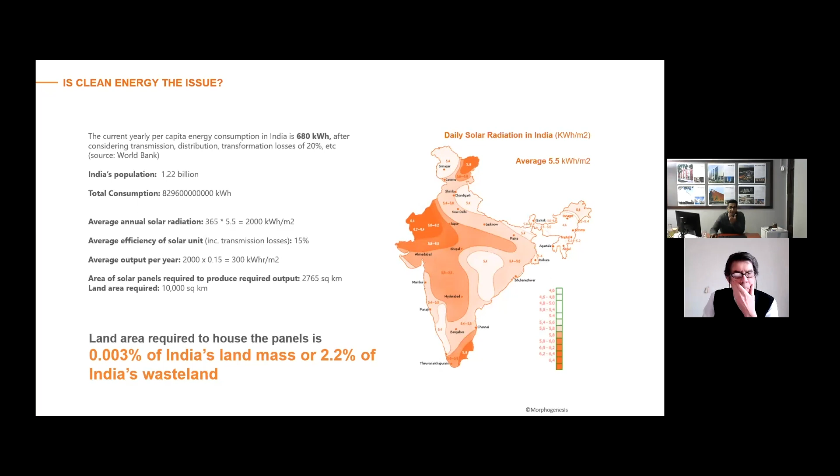Broadly speaking, India has a daily solar radiation of on average 5.5 kilowatt hours per square meter of the country's land mass, so we only really need 0.003% of this land mass if we were to drive our entire energy by solar. It's actually nothing. Only 2% of the wasteland, the deserts of India, is all that we would need to drive all the energy, not for today's requirement, but for what is projected for 2050. And we started thinking, what really is the issue then? Why? And then the second part was water.

If you just look at the annual rainfall, I know this is very macro level data, but it laid the context of what we would do at a micro level, given the fact that energy wasn't a problem, but it is. Water isn't a problem. 2% of the rainfall in India, if harvested, would suffice 150 liters a person for 1.4 billion people. So what are we really doing?

And we were looking at our cities, and we were looking at our buildings, and we had developed this sort of system where our buildings would consume energy and they would consume water and they would generate waste, and it was a one-way flow. And we began thinking of how we can short circuit that.

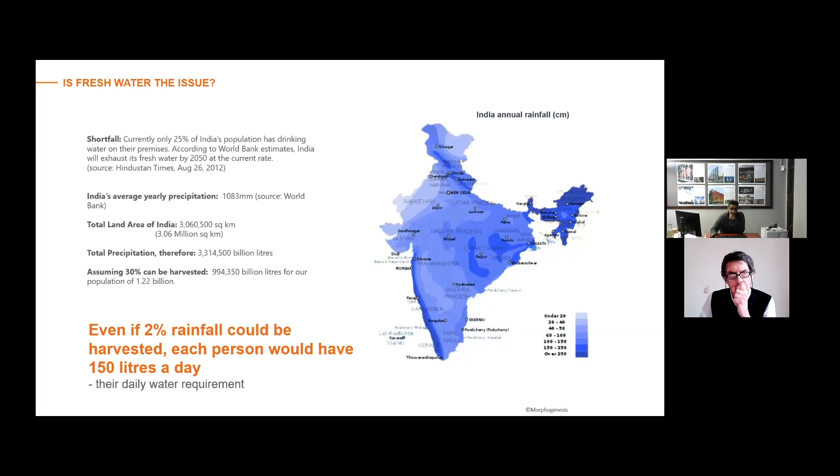How can we begin to look at our architecture where it can go off grid? If we were to assume there was no energy and there was no water, how can we begin to go and design architecture that would allow us to do that?

And then this came along, and this was now last year, the world's largest mass migration. 139 million, 140 million migrant workers were displaced in this pandemic because India is largely a country where migration is critical. And these images drove us crazy. The world hasn't seen something like this before.

And most of these migrants are essentially people working on mine sites. A lot of them are construction workers. A lot of them are working in industries, are working in buildings, are working to service urban India.

And that's when we began to think also about the fact that we need to expand the scope of sustainability, or sustainable environmental design as we understood it for the last 25 years, to begin to affect all the stakeholders, not only the building, because in a sense, we can save the planet by saving the energy, but that's not the problem. The problem really is the people.

And how do we begin to bring sustainability and hence resilience to a much larger population, all the stakeholders involved in the building process? And we began to map out, and this was early last year, all the hotspots of migration. So my presentation today is going to overlap in two parts.

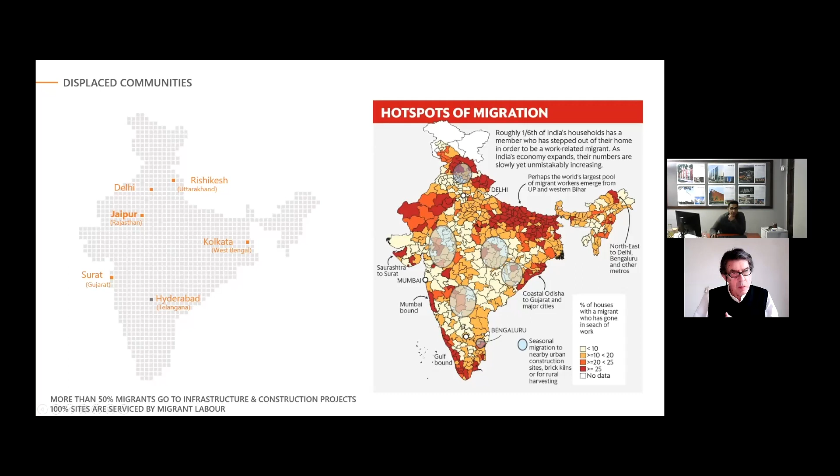So moving on, what Simos was referring to, the only reason we copyrighted our design process, which we developed over the last 2.5 decades, was more for our internal yardstick, and in fact I was a director at the School of Architecture for 5 years.

Indians, by and large, like very, very tangible data. So they like metrics, evidence-based design, and a lot of that also comes from a long history of very limited resources. So even if you have a client here, and you tell them my building will be sustainable, they don't understand until you tell them why.

So what you see on the top here is through this process of sustainability, where our main aim has been to push our projects to net zero energy, net zero water, fresh water, and net zero waste to landfill. Optimization has been mostly about how do you build less, how do you do a lot more with a lot less.

And typically speaking, a typical RCC building weighs 1,500 kgs per square meter. And if one person in an office building occupies 10 square meters, that's about 15 tons of material traveling to provide shelter to one person in an office. And if you take a residence, it's much higher.

And our argument has been, therefore, that the lesser you build, the more sustainable you are. So optimization is a strategy and a set of metrics that we have developed where we try and build less. And essentially, that's about removing embodied energy, and that's about reducing CO2 emissions from how you build something.

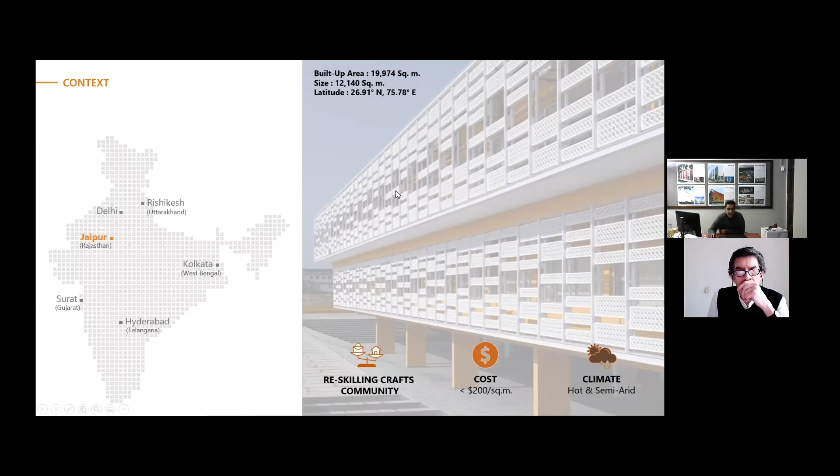And we began thinking about how we are going to be able to build this building. And the first thing that came to our head was to throw out the air conditioning. Because you throw out the air conditioning, along with that, you reduce all the electrical equipment, but more so, you reduce the fact that the power generation is also done locally. So you have these diesel generating sets that generate that power, and you get rid of that as well.

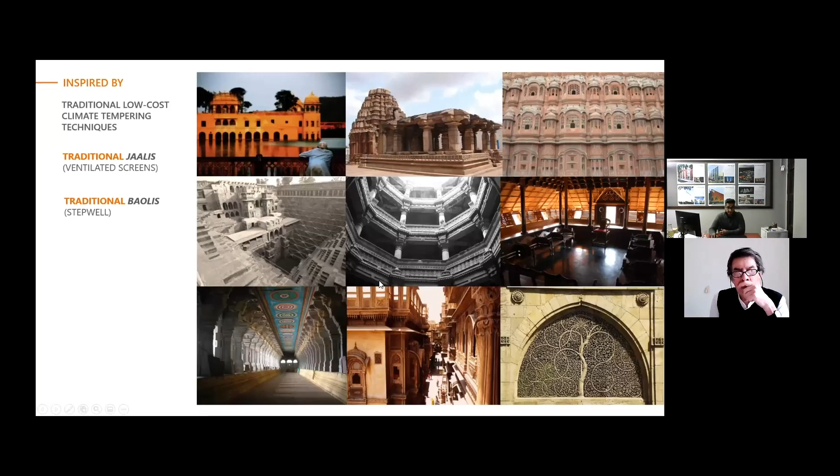And we studied a lot of the traditional architecture. We used computational models to understand how step wells work, why they are cooler at the bottom than the top. We understood evaporative cooling, jalis, ventilation, shading, and we then studied the local geology. A lot of this, I may repeat, was being driven by the fact that if this building had to be built at that cost, then what could we do? So we mapped out a 200-kilometer radius. We said every material that we will use will come from that, because transportation costs are extremely heavy.

And the other thing that we discovered at the time, which I think emanated also a bit from my studies with Simos, was that the temperature of the Earth about 3 meters below the surface is equal to the average temperature of the region. And in Jaipur, which goes from 0 to 48, 49 degrees, the average was floating around 25. And we said, hey, that's very useful. Which is why, if anyone has visited India and gone to a step well and come down, it naturally feels cooler, because the earth banking along with evaporative cooling is a phenomenal cooling mechanism. It's an underground air conditioner, naturally driven.

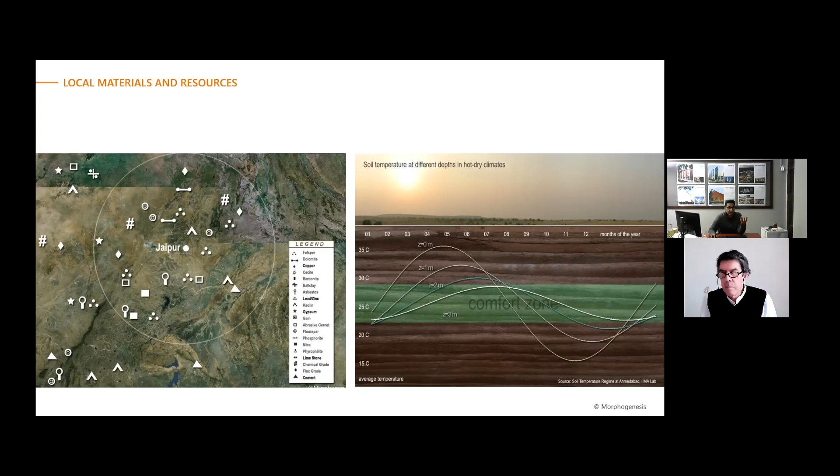So we said, fine. Now, typically speaking, any institutional building in India would be built as a block, and then you would have the open space, which is the recreation space. But when you're in a desert climate, that open space is really worth nothing. And a key example of that would be Dubai. I know that we must have a whole team there. These large outdoor spaces become mostly unusable through the year.

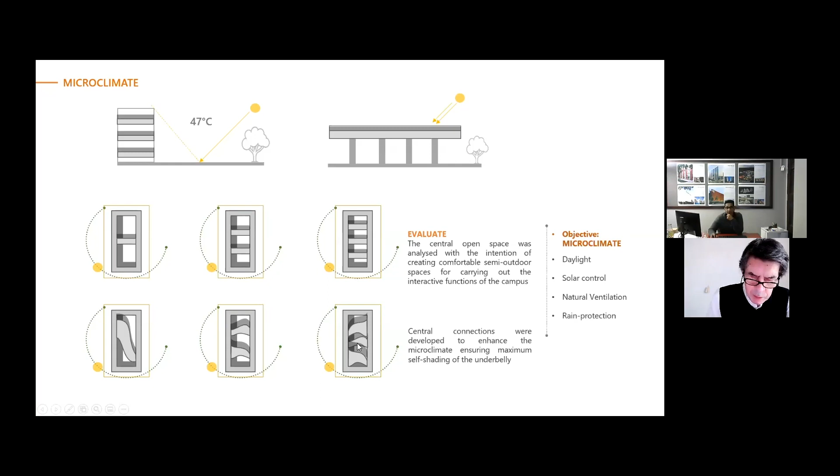And we said, well, we won't do our building vertically. We'll spread our building out and use the whole building as a shade, like a tree. And therefore, the space under the building will become viable. We did a very optimized, simple rectangular form. The idea was again to decrease the amount of surface area that we exposed to heat gain. And we went through a series of courtyard morphologies, the idea really being to keep the sun out, but let the daylight in.

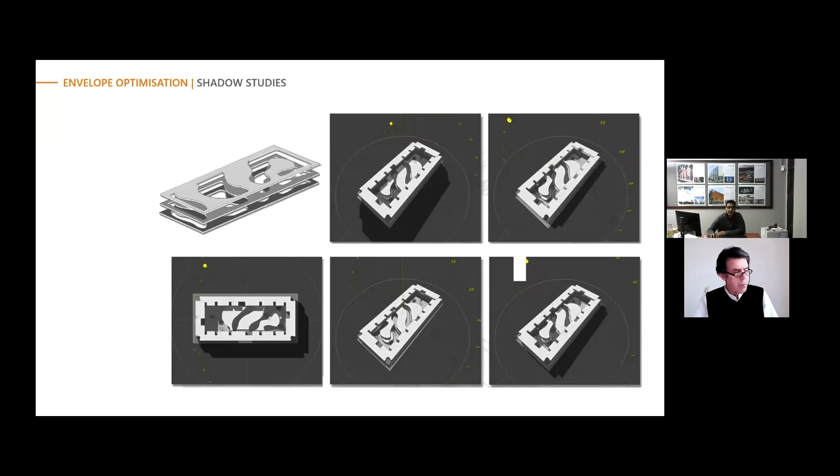I'm not going to show you these diagrams. All of you probably know them very well. But the idea really was, because it was a design and fashion school, the emotional element was that if you were inside this very rigid form, which was driven by our environmental criteria, the courtyard should not be like a rectangle. It should flow freely like a Mobius strip. And that was the model when we began about a decade back.

To achieve the parameters of no air conditioning in a desert climate, we sunk down 3 meters. We recycle all the rainwater and we recycle water from the toilets by filtering and using a treatment plant. And we created our own step well, a Baoli, in effect, which allowed for evaporation through the courtyards and cooling the building internally. And that negative space, if I may, was pulled out of the program.

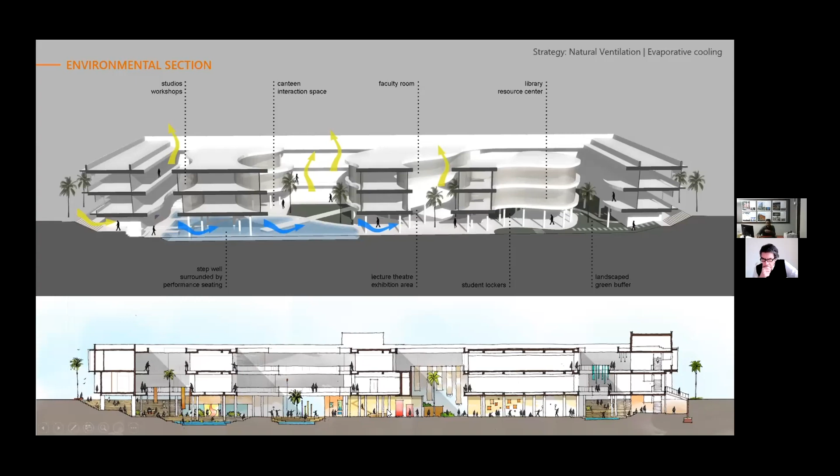So we were supposed to build about 25,000 square meters. We built about 2/3 of that. And that entire area underneath, which to date operates at about 28, 29 degrees Celsius naturally, is used for an outdoor cafeteria, for various functions, performances, etc. That whole underbelly section was designed to do that.

These are just some of the pictures of the step well that we created. All the water is harvested. Not a single drop of water leaves the site. We were just trying to work with limited resources effectively. And obviously, the whole thing sits in shade. It captures the wind flows and it cools the building down.

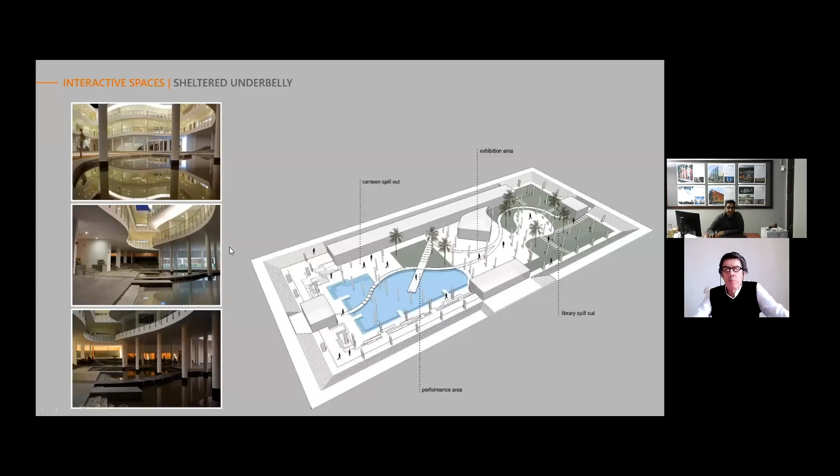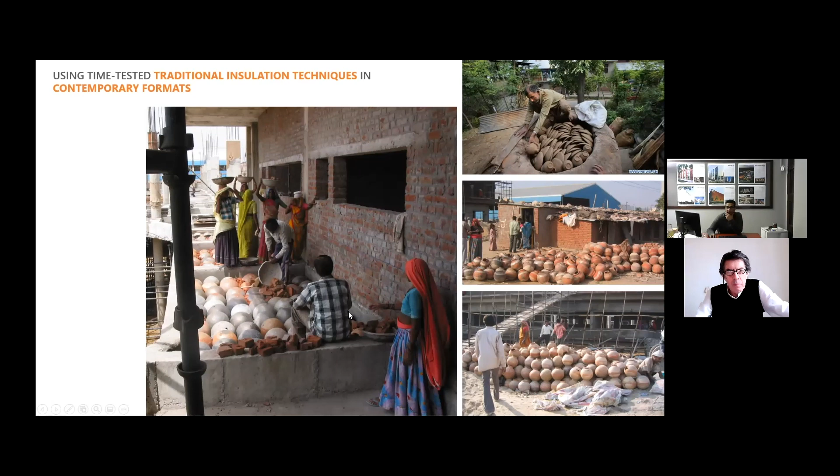We looked at insulation. Insulation was very critical for a project like this in a desert climate. There was a local community that made pots. We couldn't afford the very expensive 50 mil glass wool or rock wool insulation. And we thought that pots, which were used traditionally, would make for great insulation, because air is a great insulator. We used these inverted pots with a layer of screed on the top for insulation. The pots were made on site by this local potter community.

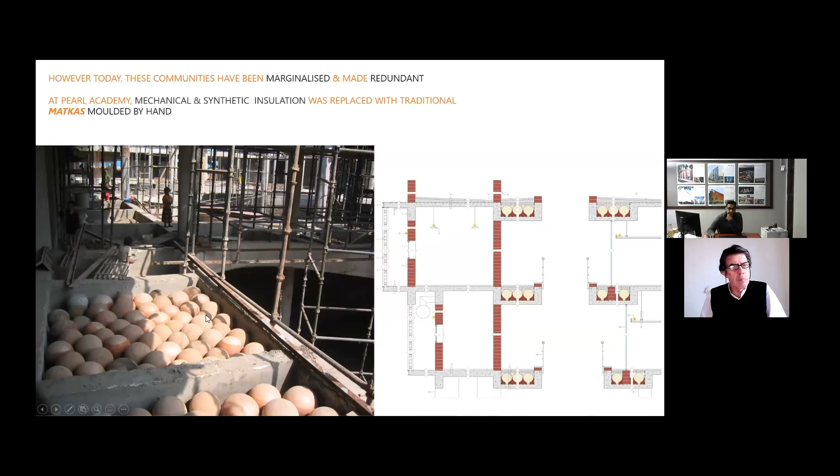For the external skin, we kept our window-to-wall ratios very optimized. We are at about, I think, 20 or 25%, providing adequate daylight. And we created this buffer space, which is essentially a service space and a screen. The screen is made by, again, a local community who make cement concrete jalis on a very simple system. And we ran all our services on the outside.

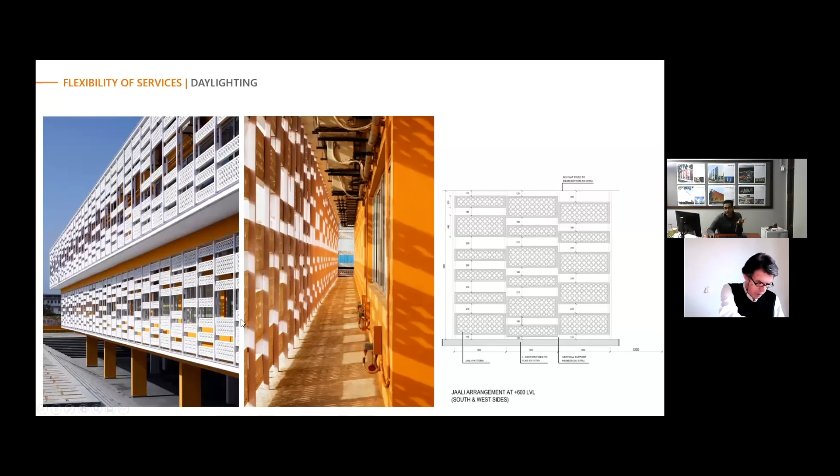So the screen allowed the entire windows to go blinds free, and the design of the screen changes based on the orientation. All the services are openly accessible. The sprinklers run here. We use the sprinklers as a facade cleaning system, because once a month they are supposed to test and flush it, so that cleans it up. And that's the building when it was finished about a decade back.

So all the materials, everything here, was from within a 200-kilometer radius. We did achieve the price point.

And this building went on to become very popular with various schools of architecture. They've gone and studied it. We've had students from various master's programs studying sustainable design, recording temperatures. And for the last decade or so, consistently in the summers, when external temperatures have hit 47, it's hit 29 degrees inside without air conditioning.

It runs on an energy performance index of about 25 to date. Very simply, we get the bill and just divide it out. And whilst it was being built, it gave a certain level of employment to the local community. And that gave us a lot of inspiration.

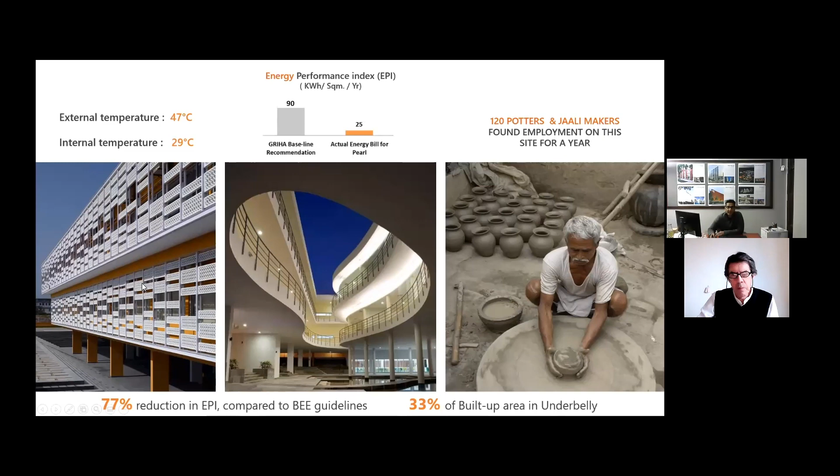And we thought that, if it was possible to get an 18 degrees delta by passive design, and it was possible to create something at these kinds of price points, pushed by the adversity of price, then what is it that we could do as we moved on? And that's when we started putting more formal metrics.

Which is why I'll jump to a very different kind of building, which is the British School in Delhi. That's a composite climate. And here, budget was not an issue. And our brief, to begin with, because it was the British School, was that they wanted it to be centrally air conditioned. All British schools pretty much across the world are either centrally heated or centrally air conditioned.

And we argued that if we can achieve as much as we can naturally, then we will do so. This project is from about 6 or 7 years ago. We then spoke to the clients, which was essentially the High Commissioner and the board, and we said, why don't we look at this 5-acre site and try to do India's first net zero energy, net zero water, net zero waste to landfill building? And they said, fine, let's give it a shot.

And so we did the math on the water, and from the 5 acres of land that we had, I'm not going to go through the calculations, but we could support a population of about 1,300 students. And we said, we'll do this in reverse. So the notion of carrying capacity comes from the fact that what the land can afford in terms of water and energy is all that we will build. And 1,300 students worked very well for them.

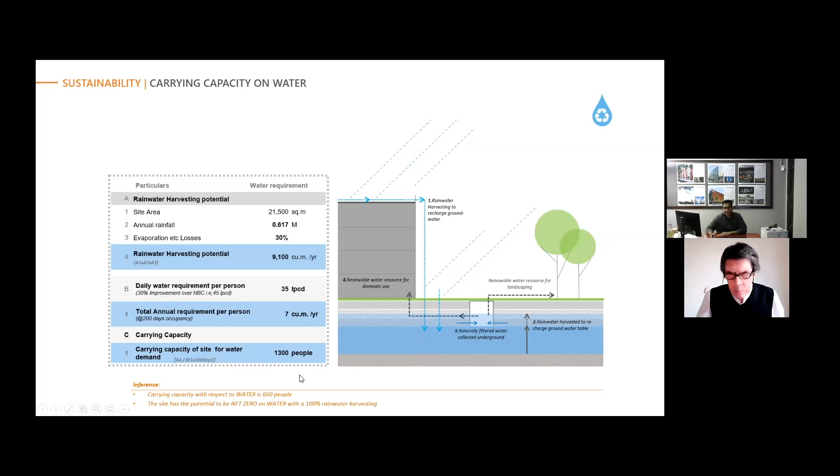We took the same 1,300 people, because we needed to build about 20,000 square meters for fitting out an IB school. And we were trying to work out the correct ratio of rooftop solar to number of levels that we would need to get to net zero, and therefore what would be the target EPI. And after a lot of to and fro, we came to a 4-story building with a target energy performance index of 56 kilowatt hours per square meter a year.

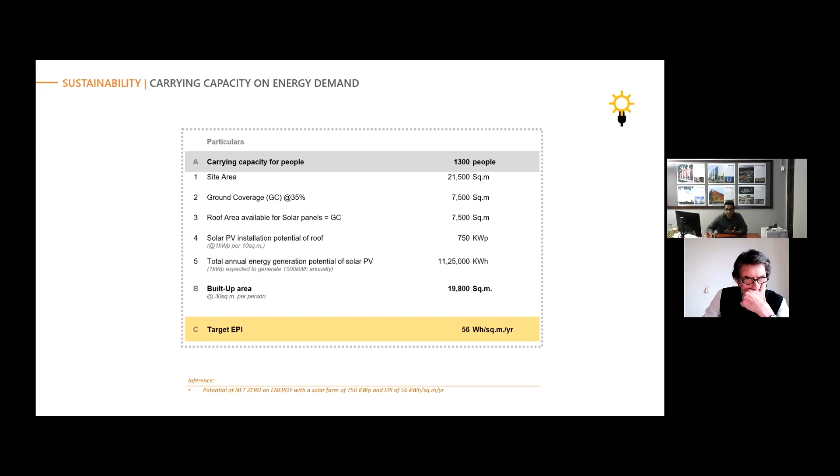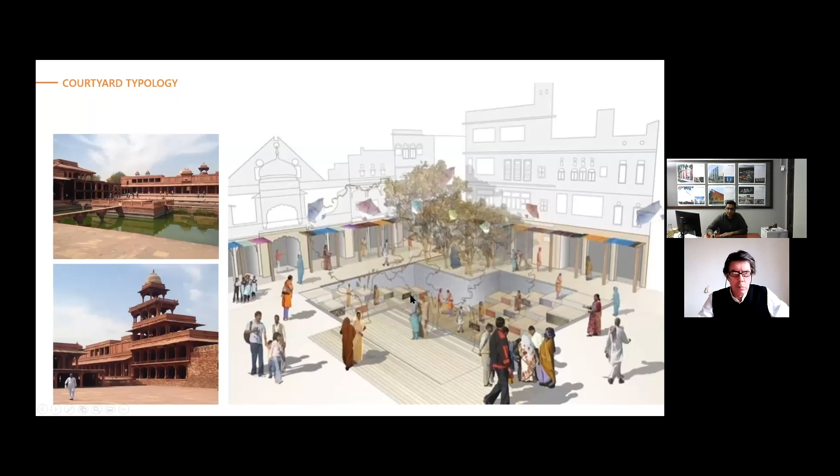Now that number would by necessity drive a lot of passive design, where a lot of the heat loads and lighting loads would need to disappear. And that's when we would be able to be net zero on water, net zero on energy. And again, in Delhi, there's a very old city called Shahjahanabad. We looked at how those morphologies work, how some of the earth banking worked.

The other key area was safety and security. Because we were propagating the idea of open corridors, not doubly loaded and air conditioned, there was the issue of security and CCTV cameras. We didn't come up with it; we studied this idea of eyes everywhere.

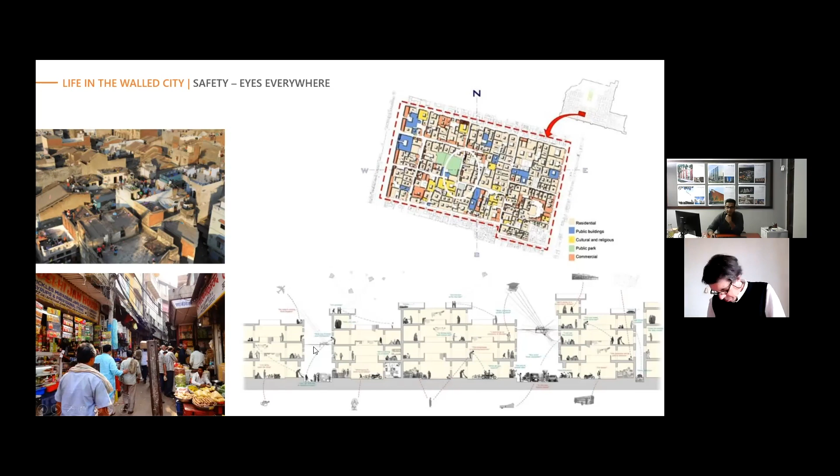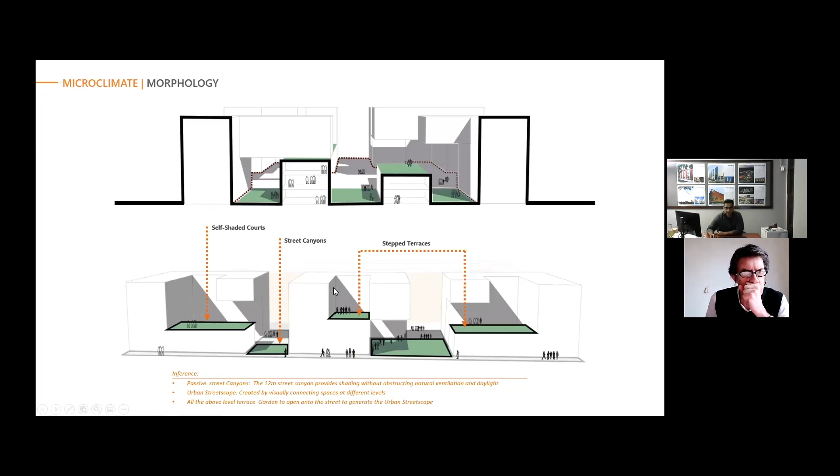If you look at the old vernacular evolution of any city anywhere in the world, in those days several hundred years back when there were no police or CCTV cameras, the cities were designed in a way that there were eyes everywhere. And that really was security. So with a combination of the two factors, we began to look at morphologies where we would get eyes everywhere, step terraces, shaded courts, and we landed up with this model with a rooftop area sufficient to make this a net zero energy project.

Some other small things that we did: we put the labs on the top because the labs are constantly mechanically ventilated because of the fumes, and that automatically creates a buffer for everything underneath. We created natural voids for the wind flows to allow for the courtyards to function properly. And because of the orientation of the site, where we had pushed that form again like we'd done earlier, we began to look at the Jaali formation.

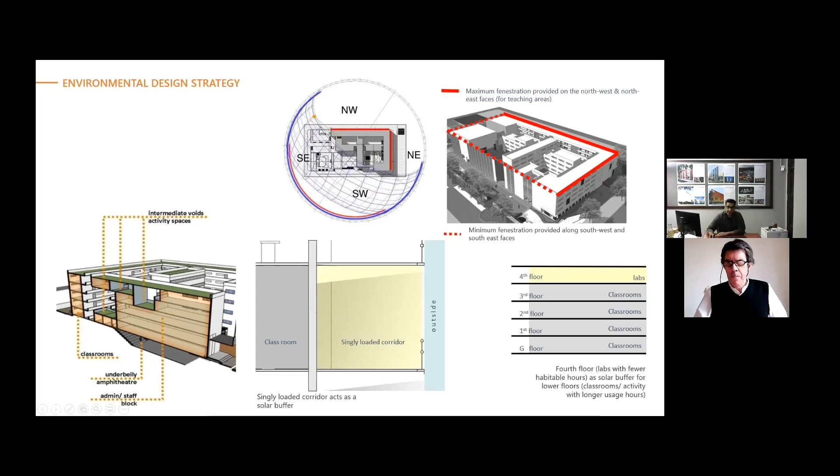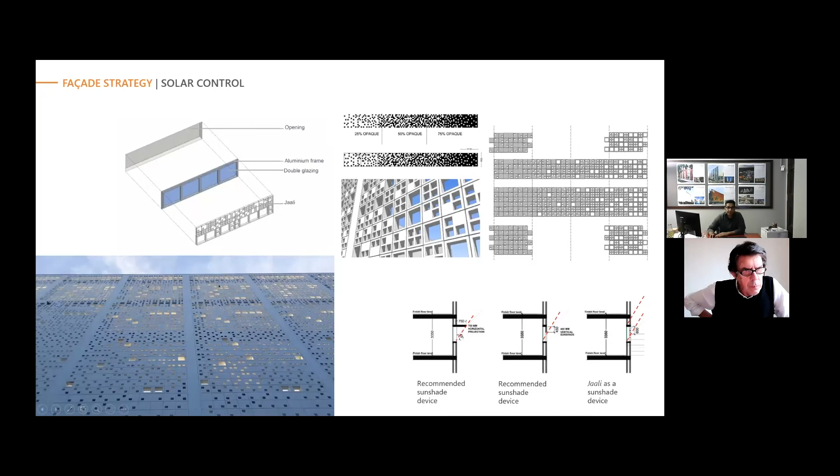Most of our teaching areas were on the northeast and the northwest, while the southwest was essentially a large screen just shading out the courtyards. A lot of this was built on site, so we came up with this construction methodology of again full windows and having a secondary screen. The screen, of course, varies its opacity and density based on what's behind it and what orientation it works to. And that's now the completed building.

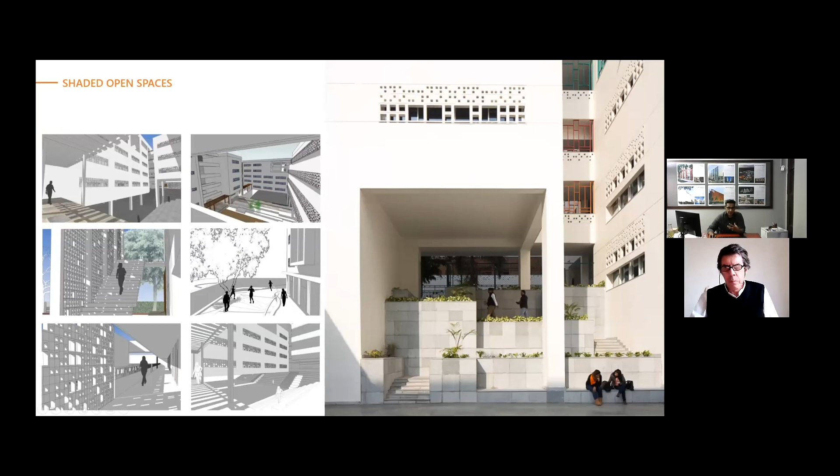We did a lot of modeling. So we had the classroom, and that was done perfectly. But to us, what was more important was to be able to create enough open spaces within which would be comfortable through the year. We were targeting a delta of about 8 to 10 degrees in perceptible temperature in the outdoor areas in the school as compared to the external temperature. And then here's that project. So that's the front screen that shades off the southwest and creates a full microclimate behind.

Again, open corridors. What you see here are air filters because it was a British school. We didn't air condition the entire school, but we did for the classrooms, and then created these passive spaces. A lot of outdoor spaces. Now, this is a bit old, but the trees are grown now. And that's the school.

Now, on our post-occupancy, we to date have an EPI of 52. It's the only school in India right now which got a GRIHA 5-star rating. GRIHA is India's own green rating system. And as I am a founding member of the green rating system, I can say that it is genuine. I didn't falsify any data, but it's operating at a 52.

Now, what you see here is a combination of surface temperature and air temperature, and then we map that back to perceptible temperature. So at a 44 outside, we did manage to get a 10 to 12 degree delta in all the open spaces inside that school. And we keep our classrooms at about 26 to 28 degrees. So there is a gradation as one steps out and moves through this entire project. And it operates today as a net zero on all accounts.

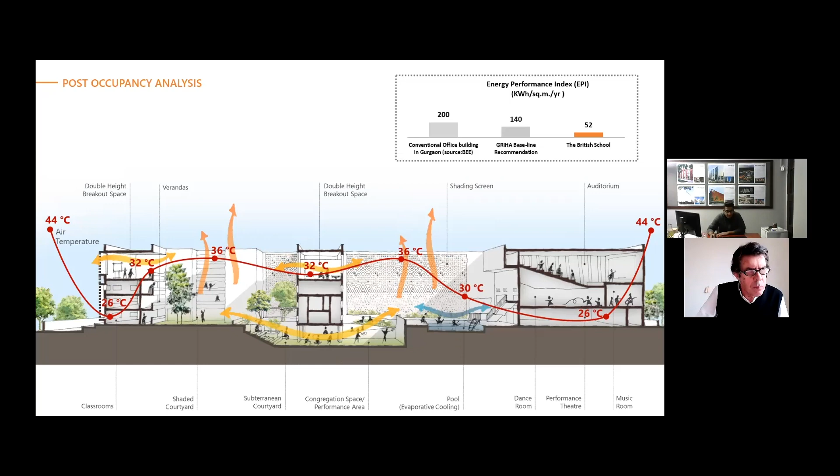So that was in that composite climate. In a composite climate, the winters aren't a problem. And it's not even the summer, because shade, thermal mass, screens, a bit of evaporative cooling, that works. The real problem has always been the monsoon. Why it works really well in schools is that Indian schools are shut in the monsoons. That's the holiday period. And that works really well, which doesn't in other typologies like offices or residential, which brings me to this third one.

This is a campus. It's a 100-acre campus for a very large technology IT firm called Wipro. They're amongst the three largest listed companies in India. And they do these really massive campuses, with tens of thousands of people working there. This is located in Hyderabad, in Telangana.

It's a very strange climate. It's not very adverse, but it's got a tremendous amount of diffuse radiation. It has barely any cloud cover pretty much through the year, and temperatures do go up, but not that high. It has reasonable wind speeds, reasonable wind temperatures, but the glare is just incredibly high. The diffuse radiation is what pushes temperatures up. And we worked on this project with S.O.U.L. It's one of several we've done with them.

And this is where we began. So we looked at the site, and that's about 100 acres. It's divided into 3 zones. And zone 2, as we discovered, was largely unbuildable because it sat in a radius from a lake which wasn't too far away. And as we discovered, it's a bit low-lying. And the really buildable areas were these 2.

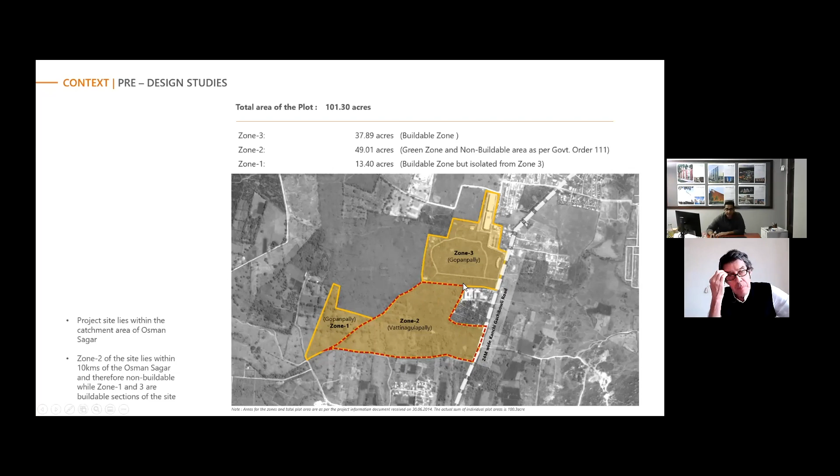We again pursued the idea of a carrying capacity. We had the 100 acres, and we worked out backwards as to how many people we can support from the rainfall. And then, to store that water, because, like I said, Hyderabad is very strange in the sense that its entire geology is granite rock, it was very hard to get to an aquifer and do water exchange with. So we really had to build a reservoir. At a 4-meter depth, we needed about 15 acres of water reservoir to support 15,000 people working there.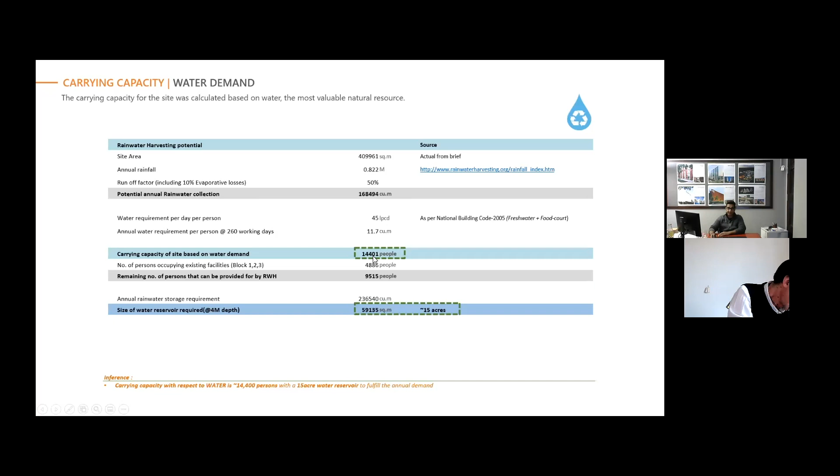And again, similarly with energy, we worked out that if we hit a 60 EPI, then we will be able to, with 15 acres of a solar farm, which we have planned over and above the water reservoir. So essentially, the solar farm shades the water from evaporation and picks up the energy. We will be net zero on both accounts. And that's what we really did.

So we identified the low-lying area. Everything slopes there. We get the natural rainwater. It's a 15-acre lake, about 4 meters deep. And then it's got the solar panels that sit on top of it and on the site and shade it. And that piece of the land will never get overshadowed. So we could do the solar farm, 15 acres, on the site itself. And that set up the basis of the first series of master plan.

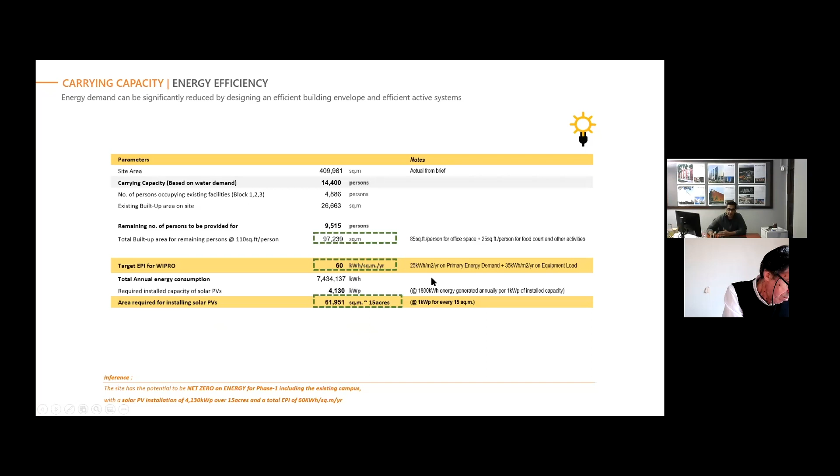The second exercise was how do we begin to hit 60 kilowatt hours per square meter per year, of which 25 is on primary energy, which is lighting and air conditioning or ventilation, and the 35 is on equipment. And how do we begin to get our building to work with the 25? The 35 was a given, so that's all internal equipment.

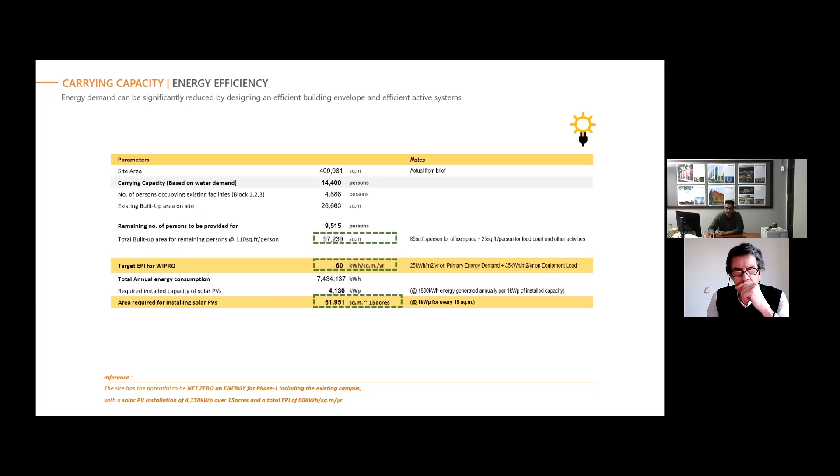The question really was, how do we work to 100% daylighting on the floor plate, and how do we bring our air conditioning requirements down through the year. To remind you, these buildings tend to operate about 10 to 12 hours a day, 365 days a year, because they're essentially very large tech companies.

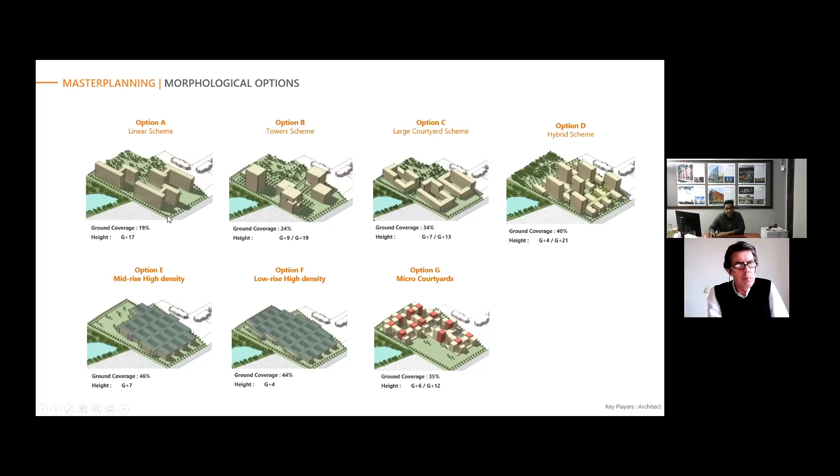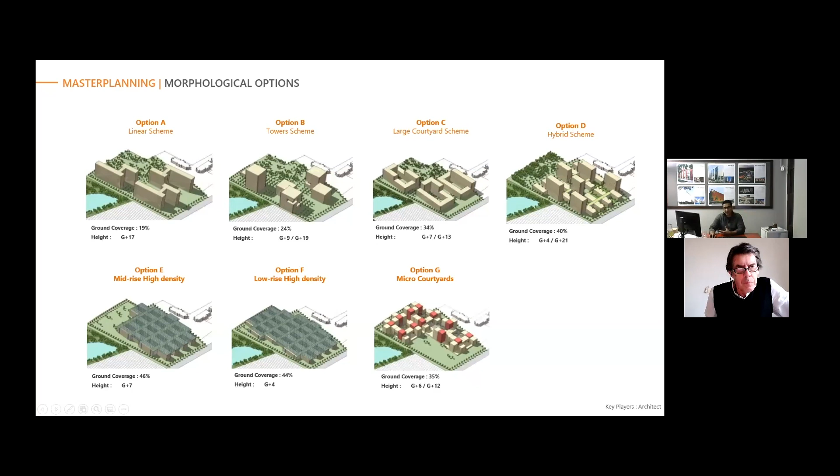So we began this exercise where we did about 8 of them. We did many more, but we isolated 7 morphologies: isolated single towers, a series of square towers, courtyards, a hybrid of the tower and the courtyard, mid-rise high density, low-rise high density, micro courtyards. We came up with several morphologies heuristically, and then we began to test them, with various ground coverages and various heights, and put them through a series of analyses.

The first analysis that we did was, of course, for wind, because wind was critical. If we were to hit that 60 EPI, which is 25, we also needed to get a lot of the functions from inside the building out, and a lot of the functions to run passively without air conditioning. Of course, where the essential work was happening would be air conditioned for various reasons; the data centers need very tight control on air conditioning. But for how much of this could be passive, we needed the wind.

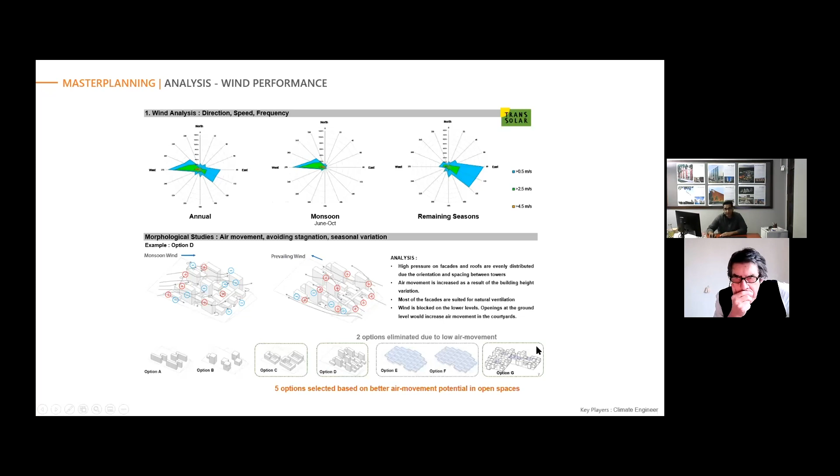Predominantly Hyderabad had an east-west wind, and we put all these various forms through it. We selected 5 that performed reasonably well. We then put them through the horizontal plane, looking at what the seasonal solar radiation insolation would be on the lower planes, and on that basis we picked a certain scheme.

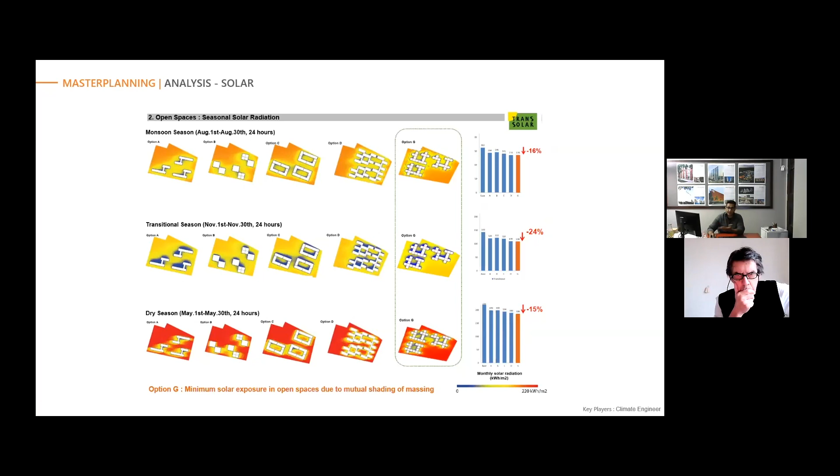We then looked at daylight autonomy for each of these 8 or 9 different schemes. This was a highly iterative exercise between wind, solar radiation in the open spaces, and daylighting within the internal spaces, and what morphology would suit it best. Finally, we selected the micro courtyard option. After doing a series of CFD runs on it, we cleaned up the entire model. Again, this was highly iterative.

If anyone is very good with algorithms, this is a great one for that kind of process. And then we finally ended up. The first phase is what is now under construction, which I'll take you through. And we've already done the urban design for the remaining 3, so that the wind flows, the evaporative cooling, the shading, all those parameters remain the same.

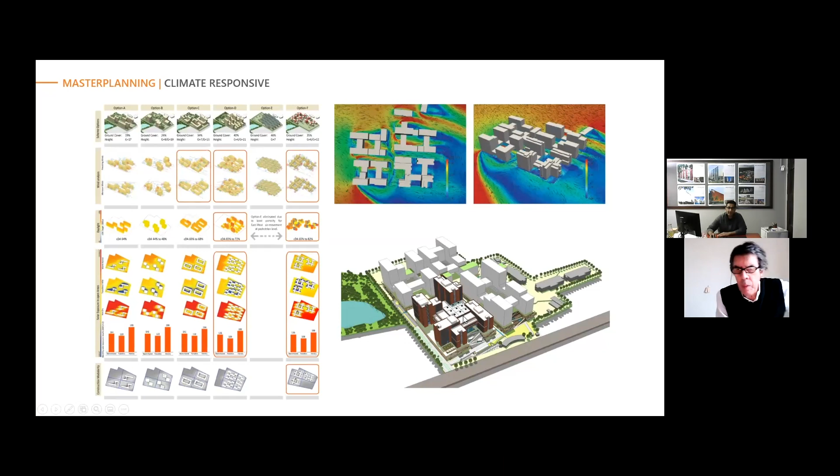Coming to that first phase, which is approximately about 1 million square feet, about 100,000 square meters. We began looking at the outdoor spaces and trying to push the agenda of how can these outdoor spaces really begin to take primary functions. Can they replace the meeting room? Can they replace the gym? Can they replace the food court? What functions can they actually physically replace outside?

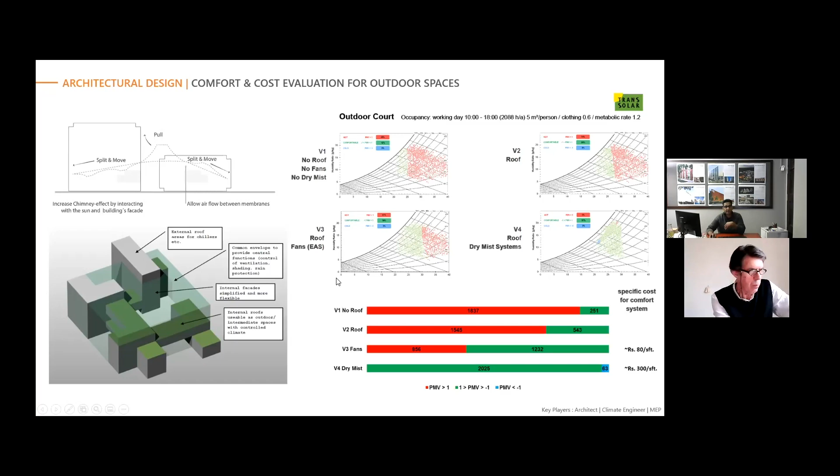And we went through a series of analysis, looking at a combination of having no roof, no fans, no dry misting, and having only a roof, like a lightweight tensile roof, a combination of roofs and fans, plus dry misting. And we then did a cross analysis of what would be the financial savings vis-a-vis these spaces sat inside air-conditioned spaces. And that sort of led to this design, which I call a large desert cooler. A very traditional desert cooler is essentially what used to be there before air conditioners, a box with a fan, and you had this sort of hay on the side where water ran down, cooled it and shoved it through.

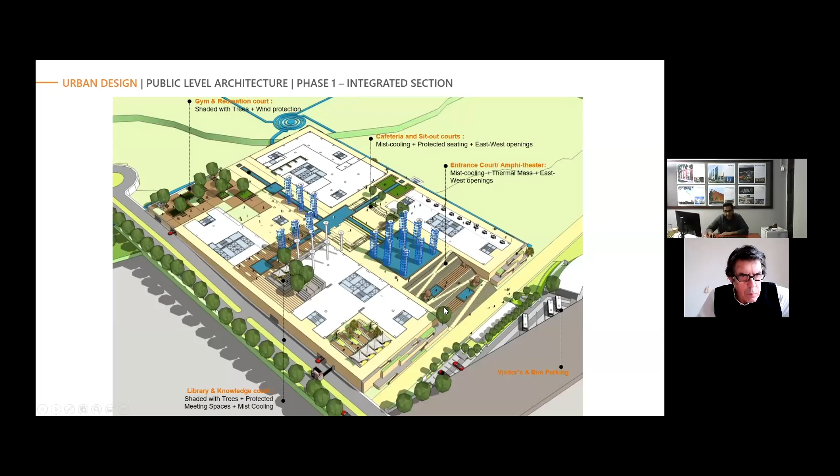And so the entire plane, which sort of sits on an elevated podium, was designed for those wind flows and those outdoor spaces. And we worked with SBP. We got this sort of height with this sort of tensile roof in combination with Transsolar and us, and we got this entire outdoor space working in a way that it is comfortable through the year. So it's comfortable for rain, it's comfortable for the summer, it's comfortable for the winter. And by and large, this entire outdoor space now takes on primary functions.

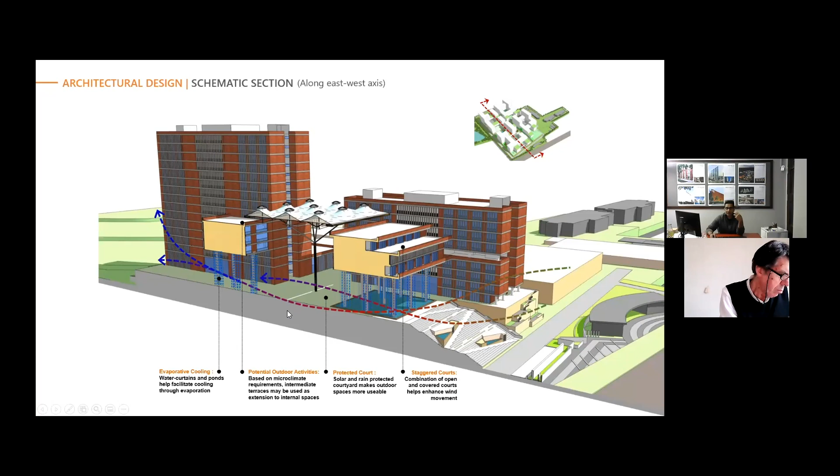I won't spend too much time on the indoor spaces. We went through a similar exercise of looking at various kinds of mechanisms of how can we remove as much air conditioning from the inside, whether it's underfloor, with heat recovery, hybrids, low velocity fans, and came to an optimal solution. Again, a lot of this is very cost-based, but it's a combination of sustainability and cost. And of course, our client agreed to an internal temperature of 28 degrees, which is very useful, and it's actually correct, because external temperatures can go up to 38 to 40 degrees, and working out the whole system based around that.

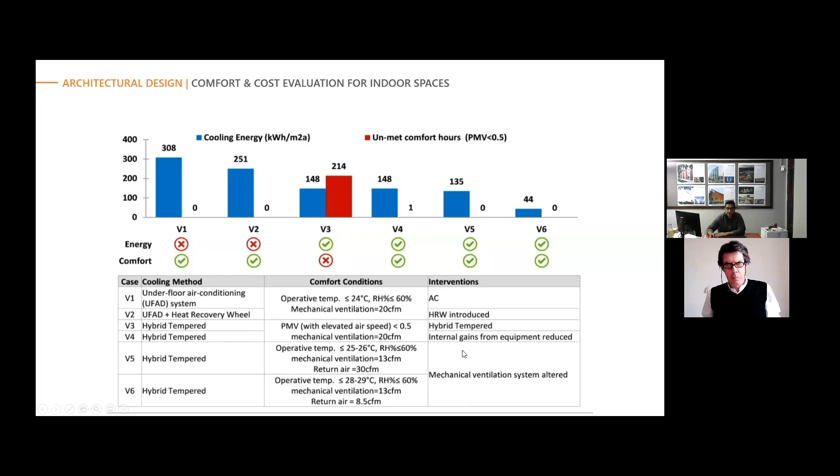So when we finished the design, 56% of the area was under air-conditioned space, but consuming less than half the air conditioning. Typically speaking, in this region, a building would consume 250 square feet for 1 ton of air conditioning. This project is operating at about 650 square feet per 1 ton of air conditioning. So even though 56% of the spaces are air conditioned, they're consuming less than half. About 35% have been moved to natural ventilation.

Now, when I say natural ventilation, and the third piece, which is shaded outdoor, all of these are achieving thermal comfort conditions through the year, greater than 90% through the year. So not only did we manage to get about 10% of that area outside, which is nearly 10,000 square meters. So cafeteria, gym, recreation, library is in that outdoor shaded space that I was showing you. We have outdoor meeting rooms, which were removed from the inside area, and of course the arrival plaza. And in the naturally ventilated spaces, we have various other functions. So effectively, only half the building is air conditioned. This typically would be at 100%.

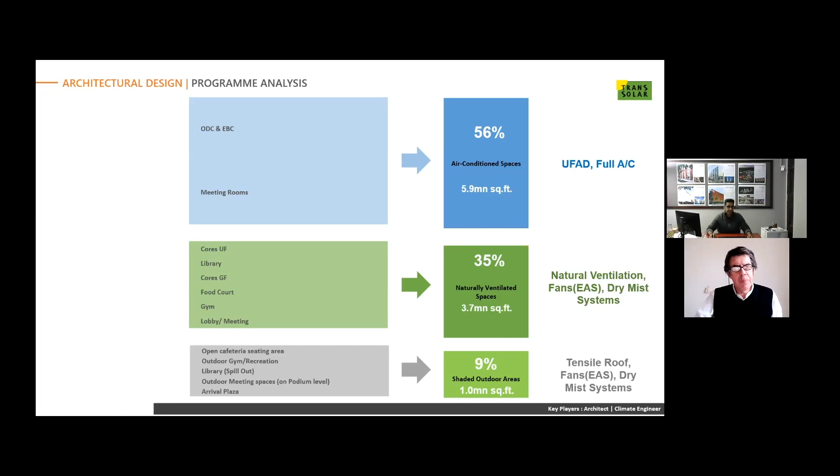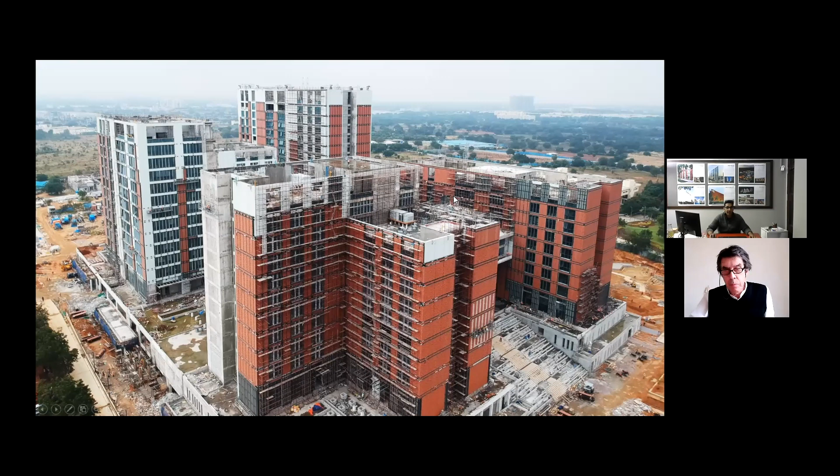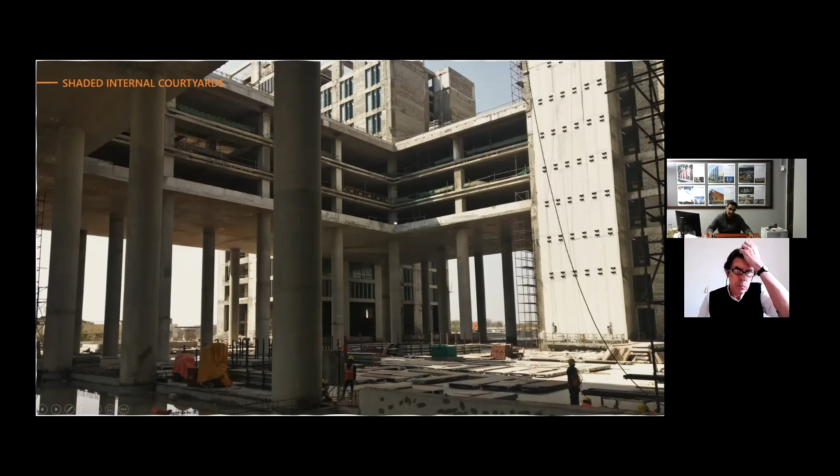And anyways, this is just some of the views of the building. And that's the building currently under construction. It got slowed down last year because of COVID. That's the east-west axis for the wind, and the columns have these water channels that drop down, causing the evaporative cooling across the winds that go across. The central courtyard, which is shaded, will have the tensile roof with the food court, the gym, the library.

And even at this scale, a grade A office building, operating at net zero on all three accounts. But more importantly, was the fact that we could do this. We could break that mindset about office buildings at this level of density; there are 15,000 people who are going to work here by the end of this year. And of course, I won't get into the details and the metrics, but we broke a lot of ground here. Between our envelope design and energy performance, we are under 35. We wanted to be at 25. We didn't hit 25, but we're at about 30 right now.

And fresh water demand, we are at under 50% of that. We went to the point where even the structural design was defined in terms of how much steel and how much concrete is going in and how can we optimize to save CO2 emissions in embodied energy. But it did work, and it's about to get completed. So anyways, post-occupancy will tell us, but that's where we were.

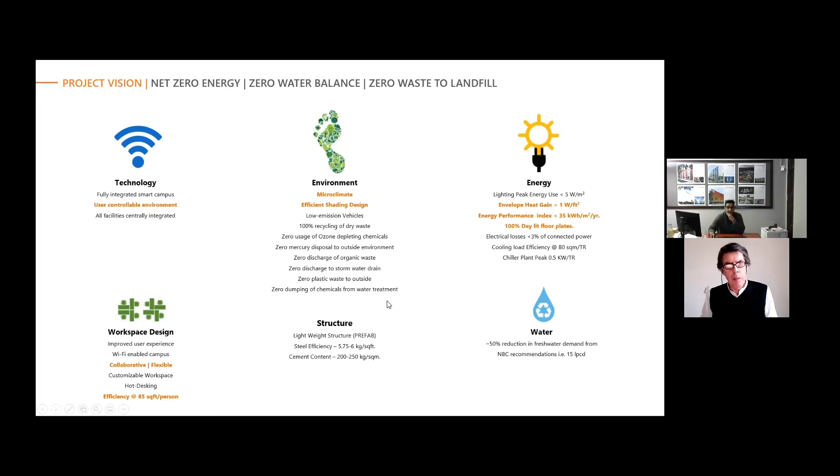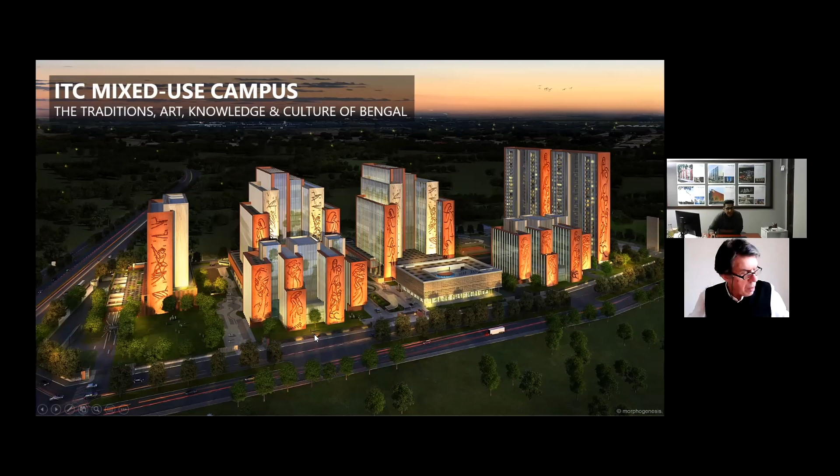I'm going to shoot across. I'll just do another, I might probably be out of time already. I don't know, how much time do I have left? Do I have 10, 15 minutes? Yes, of course. Okay.

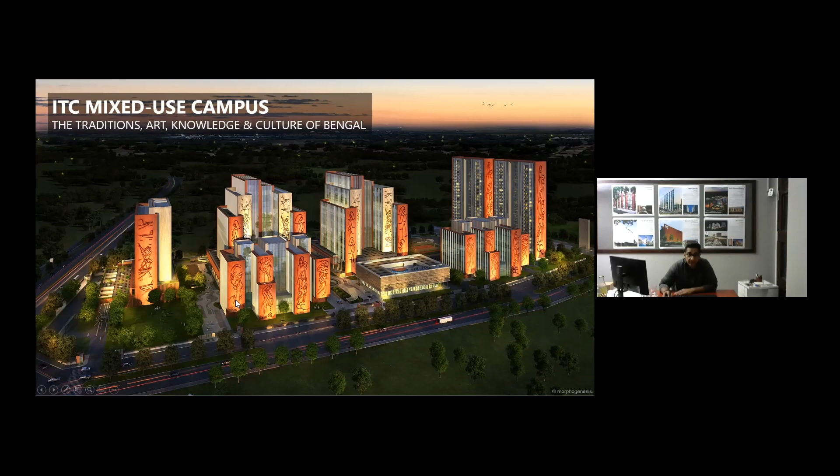So, dramatically different project. This sits in Kolkata, which is the extreme east of India. It's got a warm, humid climate, extremely humid, and temperatures don't change very much through the year. It's very close to the sea, but it's also in some senses the cradle of civilization. A lot of the first universities, the first art, knowledge, culture, music, a lot of that was born in this part of the world, in this city particularly, and we began looking at the site.

Now I think the total area here is about 3 million square feet, if I'm not wrong. Yeah, about 300,000 square meters, and it's a 17-acre site. Now, we did the math on this. We couldn't push this one to a net zero because, like I mentioned earlier, the city maintains a greater than 70% humidity pretty much through the year. And therefore, in a mixed-use environment consisting of offices, hotel, conferencing, data centers, etc., the air conditioning was inevitable.

However, what we started thinking about was what could we do in terms of the entire site, and therefore we set up a site plan where we could maximize the wind flows through the site and all the buildings. Because Calcutta sits on a 22 degrees latitude, which is pretty much the tropics, we tilted the buildings 22 degrees from pure north, and what that allowed us to do was essentially shade from one side. Because when the sun overshoots, you end up shading from two sides, and it led to a 25% reduction in solar exposure.

We found this very interesting. Every time you tilt a building towards the east from pure north, by the latitude the building sits at, it helps cut down solar exposure naturally, which helped reduce the amount of shading we had to put into the building in the first place.

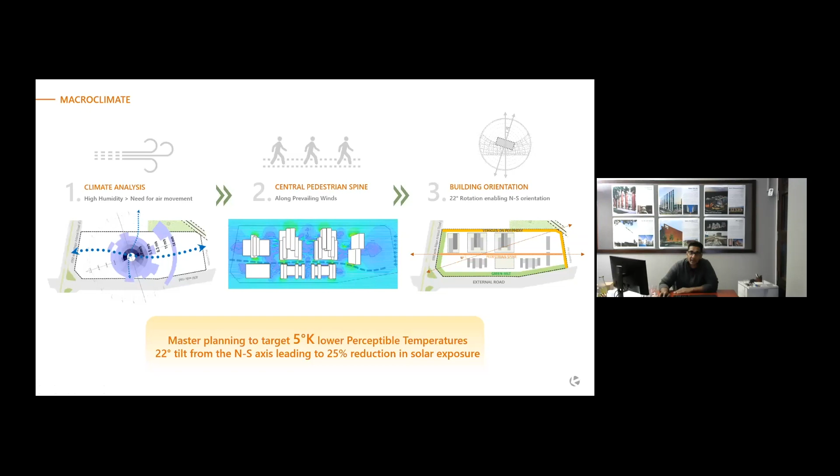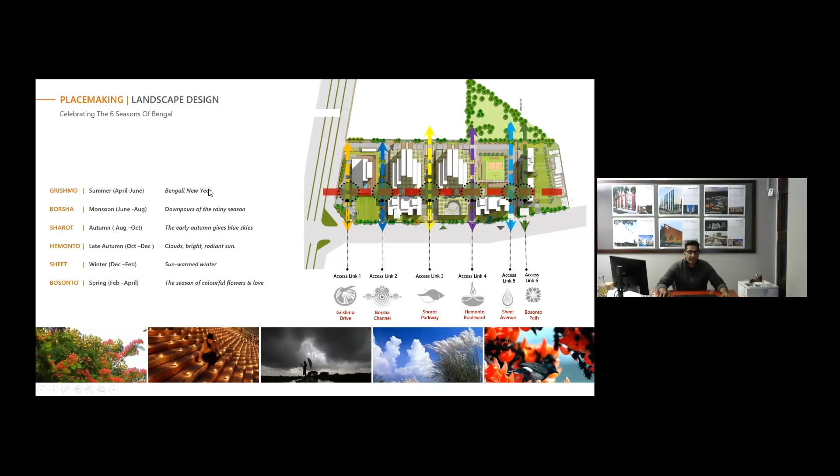Then once we had that east-west axis, we left a lot of cross axes as well, because we wanted a lot of natural ventilation. Wind speeds are not very high in Calcutta. They're at about 2.5 meters per second, but over the year, they change direction. Which is why we had to have this very free, as opposed to the previous one that I showed you, which was very fort-like, very channeled. This had to be very open and transparent. I won't go into the landscape design of how that works with the wind flows.

The second problem that we had was a lot of this was very large floor plates, 40, 50,000 square feet floor plates. And traditionally with large floor plates you get these very deep 60 by 60 or 50 by 75 meter floor plates, and your daylighting, if you're doing daylight autonomy, drops to anywhere between 40 to 50%. We took the same area and changed the morphology of the building so that we could push that back to about 90 to 100%.

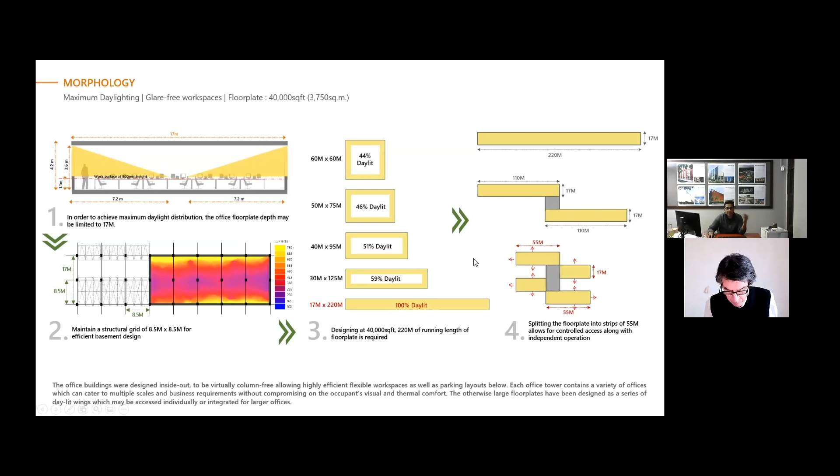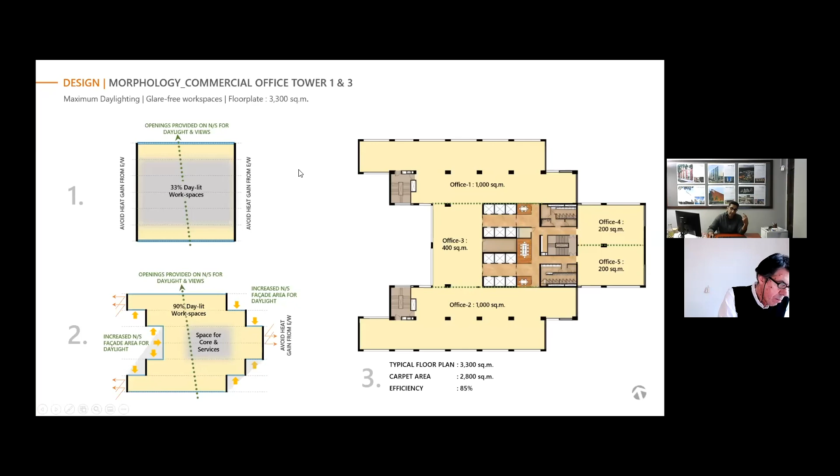And the point really about that is that you don't really have to work with the form as a given. If you go iterative, the same exercise allowed us to break this up into where we put our core and how the form breaks up, where we get 100% natural daylighting. So that was the final piece of design when we finished up, I think, about 2.5, 3 years back. It's been in construction ever since.

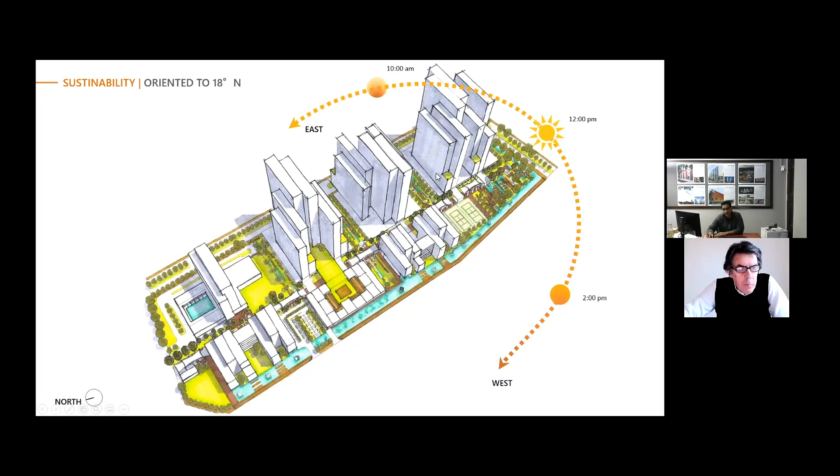So now that we had a microclimate on the site, as you can see, this is all reasonably well shaded, it's well ventilated. We now started working with a lot of the local craftsmen. And that goes to my earlier point about how do we work with local communities? We found a lot of this tradition, art, knowledge, culture, and we brought that back. So,

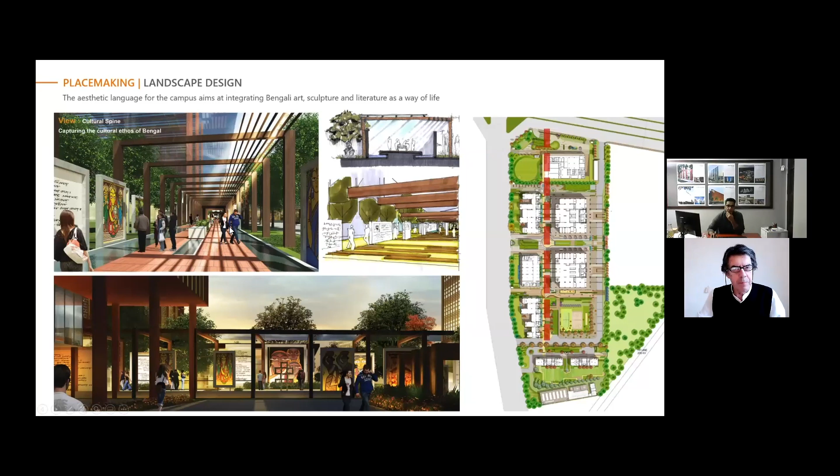Okay, great. Yeah, so we treated the entire 17 acres of the site as an open air sculpture and art gallery. Naturally ventilated, naturally weather protected, 17 acres of outdoor, if I may, an arts and crafts museum. We worked with a lot of the local art schools and the local craftsmen who had this incredible craft who make all these sort of sculptures.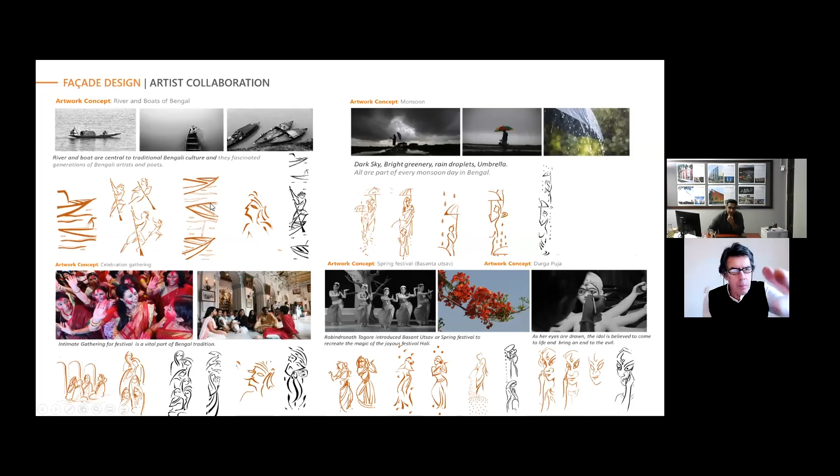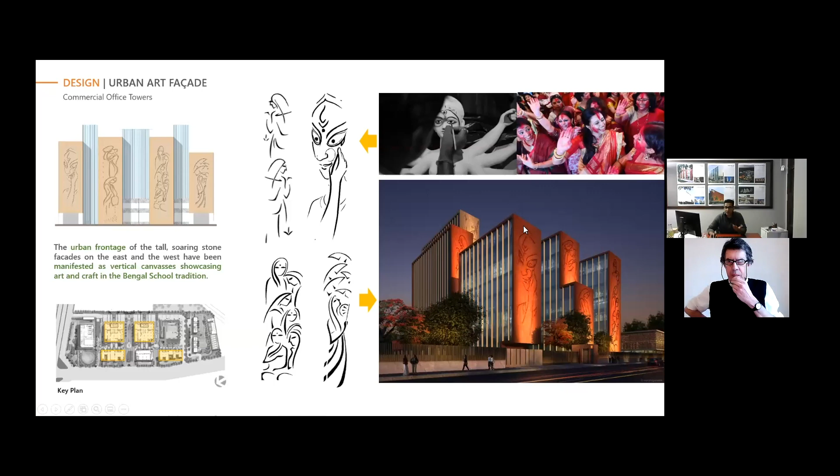And we then used a lot of the traditions of Bengal, of Calcutta, and abstracted them into this sort of graphic artwork, which the artisans could work with. And we then started using the west and the east facades, because all our buildings were north-south, albeit turned 22 degrees. And started working with them into sort of creating this urban art form, where it provided great amounts of insulation because they were just carving local stone, and we were working with that.

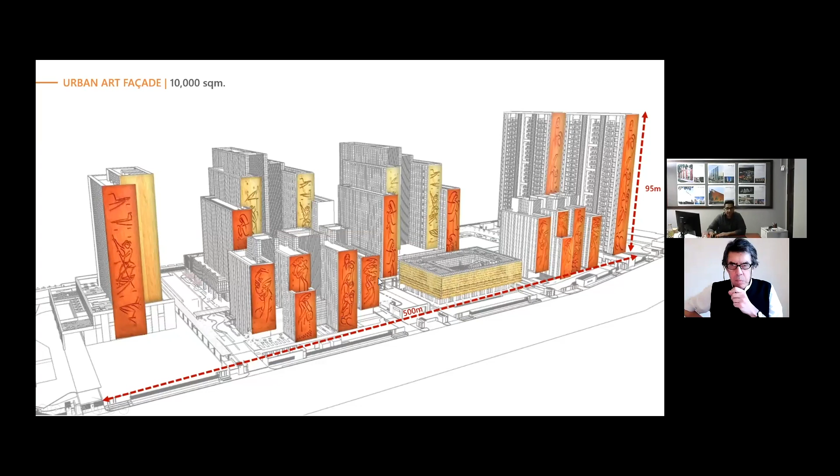And of course, working with the local alphabet, and again working with the stone, and coming up with this sort of 500 meter by about 100 meter long urban art facade. This is all west, and a lot of this sort of being crafted by local craftsmen. And again, on the other side, on the east as well. So that's the project, again, under construction, where a lot of this, again, is being done on site.

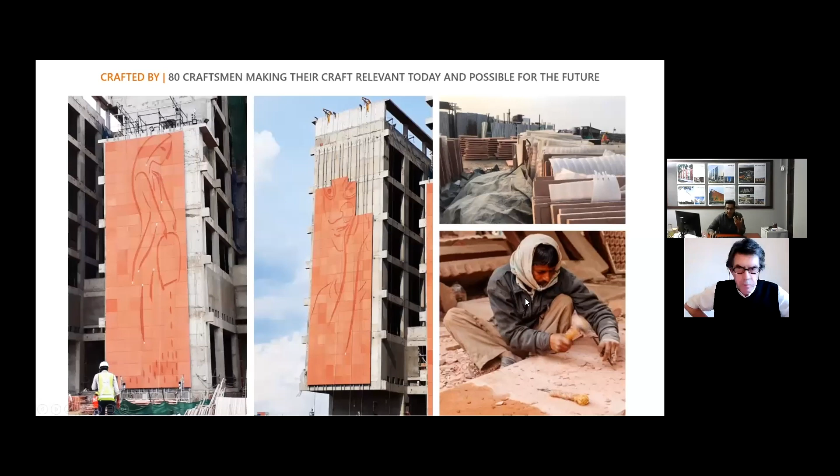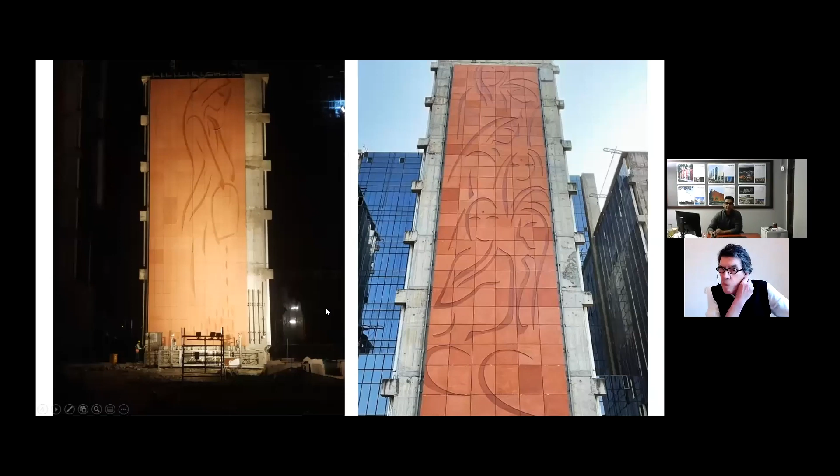And this we've done as a very, very deliberate move. These are dying communities. Craft communities are dying communities. And I think the more we work with them, the more we learn from them. They seem to have a better heuristic understanding of what we understand computationally. And this entire 500 meter by 100 meter high urban facade is being put up by these local craftsmen, eventually leading to that on completion.

So we managed, in a very, very humid environment, to get an EPI of 43 by a lot of these measures. So we are 90% daylit, zero glare, which is critical because what you really don't want to do is draw the blinds if you get the glare and then switch the lights on and it all goes south. So glare-free, 90% daylit, window-to-wall ratio at 25%.

Our facade is at 1 watt per square foot, envelope load design. And of course, the entire site is fully ventilated. That's how we managed to hit the 43. And even in a humid environment, we've got a 5-degree delta in perceptible temperature. So from 36 degrees to 31 with ventilation, it works really well, even when you go and stand there on the site even today.

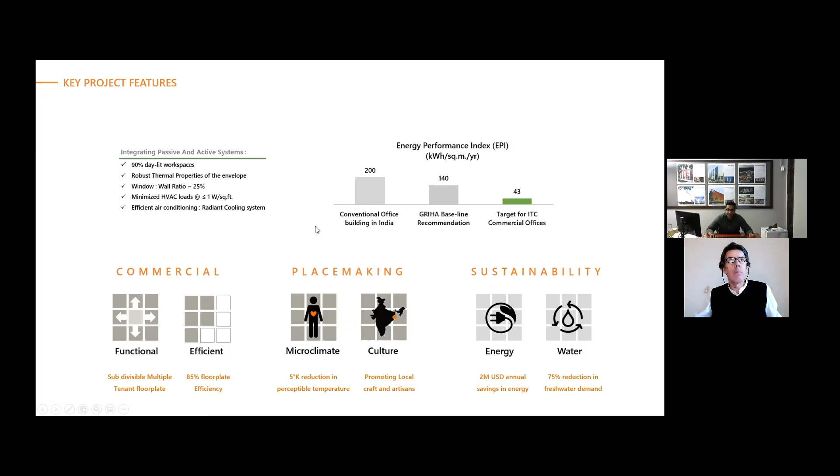And in the interest of time, I'm going to do this last one. It's a precious project. We finished this, and it's precious because it was done during the COVID times. It just finished recently, a few months back. And this was a project that came to us about a year and a half back, pre-COVID. And it sits in a remote area in the hills in Uttarakhand.

And we went there pre-COVID, and we looked at the community, we looked at all the local materials, we looked at how they live, and we found a very high level of resilience. And in that 1 kilometer radius from that site, we found about 800 people. There were about 150 hutments. And we said, fine, we're going to build this here. And we had a great client who agreed.

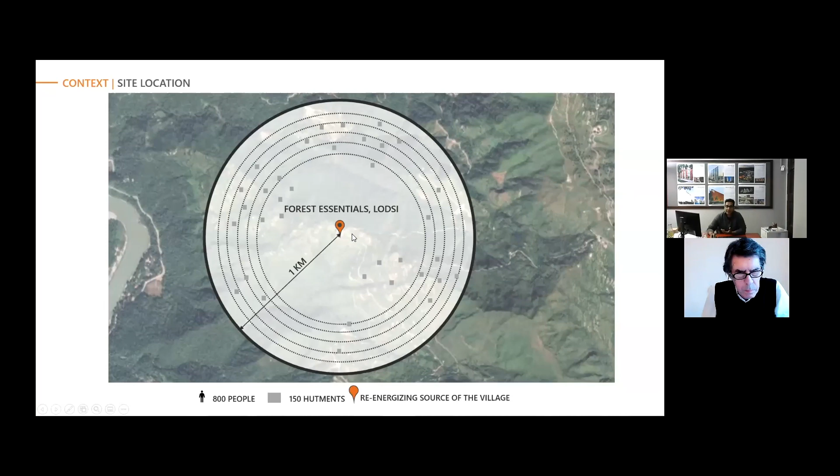And of course, it had to be completely off-grid. But also no material could come here. There was no road bringing trucks of material up here. So we built with very, very simple form. A lot of it was driven by what local materials we had.

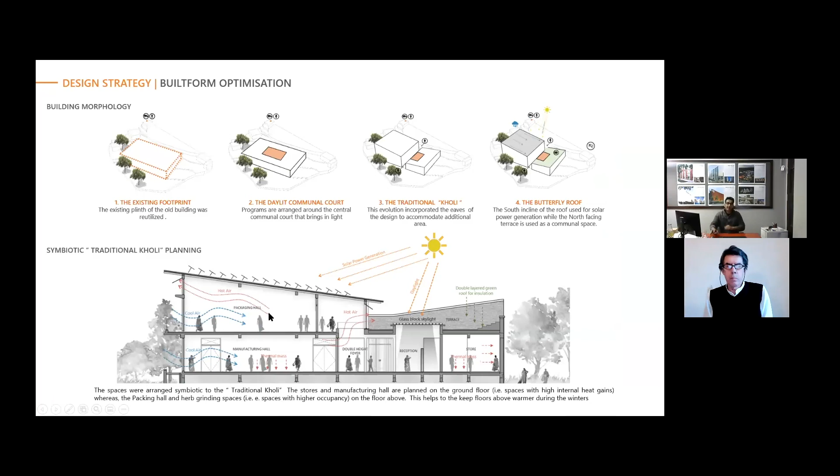Courtyard, south-facing for the solar panels, and then a secondary terrace for drying some of the Ayurveda stuff. Naturally ventilated, all driven, good passive principles of design. Nothing very, very innovative, but easily buildable. Of course, we did a lot of studies pushing down the window-to-wall ratios. Glass was the one material that we had to get from a remote town.

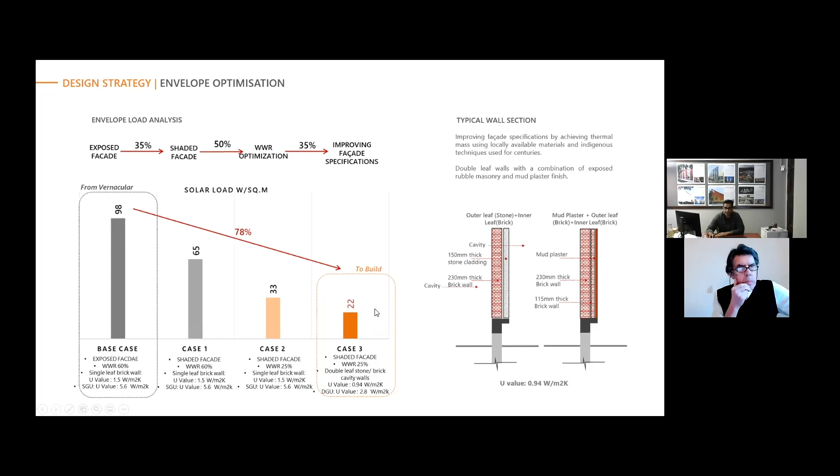And we went through a series of exercises from the base case, which was the vernacular, and the fact that we were going to put a production factory making these Ayurveda luxury products that are exported to New York and London and Paris, and are in shops on the high street. And essentially, that was a sort of finished section where, because of course it gets very cold in the winters, it's high in the hills, it's warm in the summer, we managed to get through the year a reasonable level of humidity and temperature control purely passively.

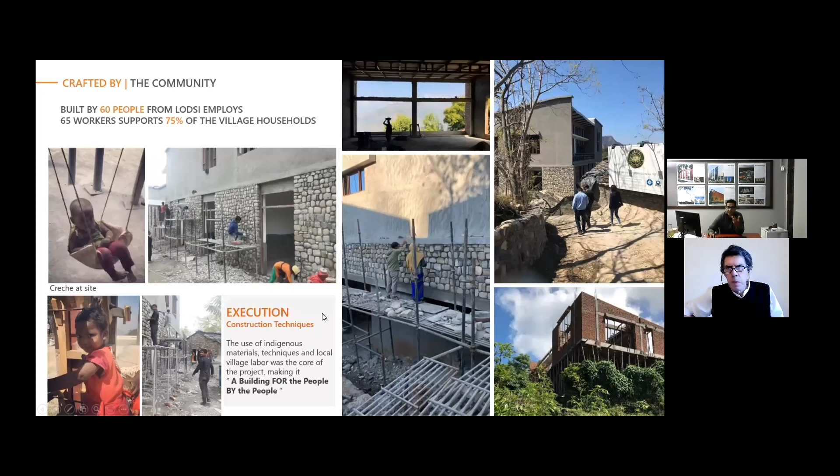More importantly, it was entirely built by the people who work here, by the community of people, and the architecture and the materials were all based around that. We learned a lot more about passive design from them, of how to handle this in winters and summers, how to harvest the water, reuse the water. And that's the project, sitting off-grid, isolated. Of course, it's net zero, it's energy positive now, and supplies some power to some of the hutments as well.

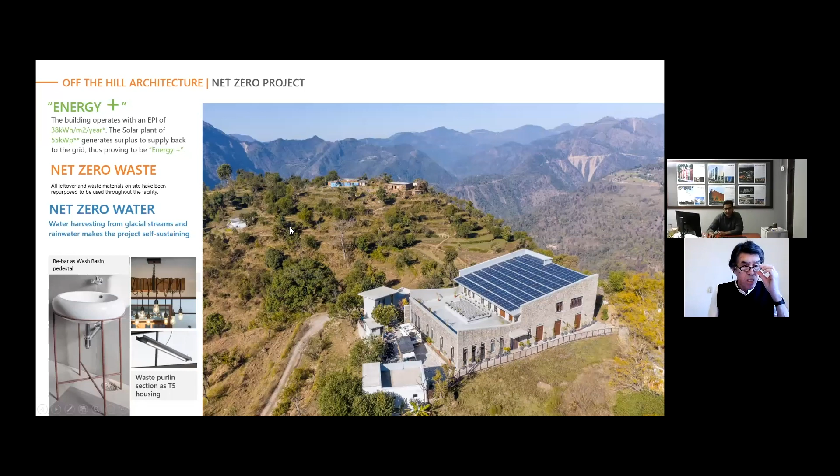That's the factory now in use. Low velocity fans, windows open, natural daylight. It's a project by the community, for the community, built by them, supplying a product to the global world. And that's setting up there. It's used as a school in the evening by the same community.

And that's it. Yeah, so I'll skip the last one. I think that's my hour coming close to being nearly up. And this is just a two-decade history of a variety of projects across various climates and various challenges. But at the core of it has always been the same principle. We begin by thinking, what if there is no energy and water? What do we do? How do we build?

And of course, you will consume. So get as much equipment out of the building. Get rid of the air conditioning as much as you can. Reduce your heat loads. Work as much as you can with local materials, with the local communities. And that's what will give character and identity, and hopefully will lead to an architecture of resilience. So that's it. Thank you very much. That's my presentation for today.

Thank you so much, Manit. Thank you for this fascinating overview of the journey that Morphogenesis has taken in these 25 or so years. Thank you for sharing it with us.